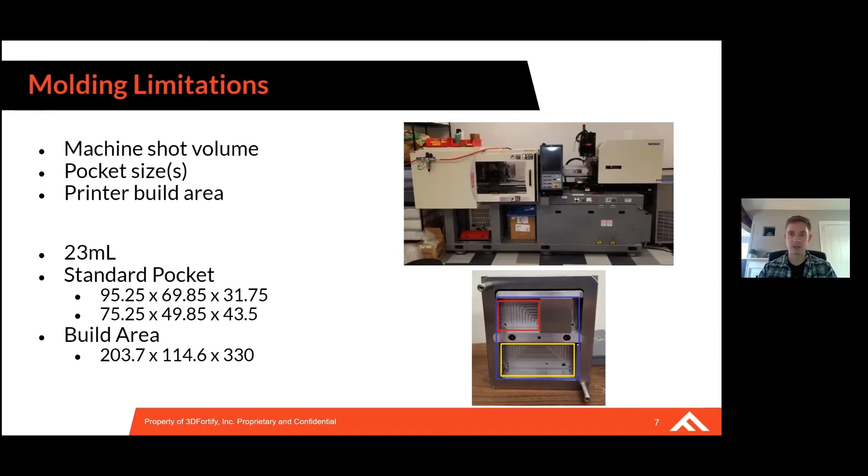So once you set up your bounding box for what's moldable for you, we're going to look at the difference between a moldable part versus an unmoldable part.

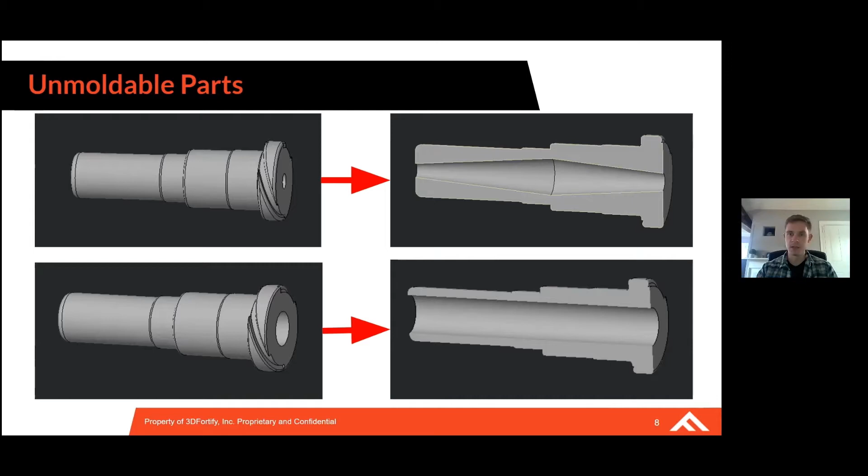With our first example here, we have this luer lock component with 2 separate iterations. The top iteration has a conical shaped through hole going through the center, and the bottom image has a straight through hole going through the center of the part. The top part here is actually an unmoldable part. If we look at this center section, that through hole gets a lot wider in the center than it is on the ends, which prevents us from having any printed geometry going through the center of that luer lock component. So we're not going to be able to eject that geometry, therefore it's an unmoldable part. That's something to look for when you're designing any of these parts. You want to make sure that for any feature you design, you're able to eject that geometry straight out of the part. If you can't do that, then the part is probably unmoldable.

For our second part here, we have this capped part. This one has some nice threads and a through hole. The top part ends up having a surface at the bottom, whereas the bottom part is completely open. This surface at the bottom for the top part is going to, again, prevent us from ejecting any geometry that's inside of this part. So therefore, this would again be an unmoldable part.

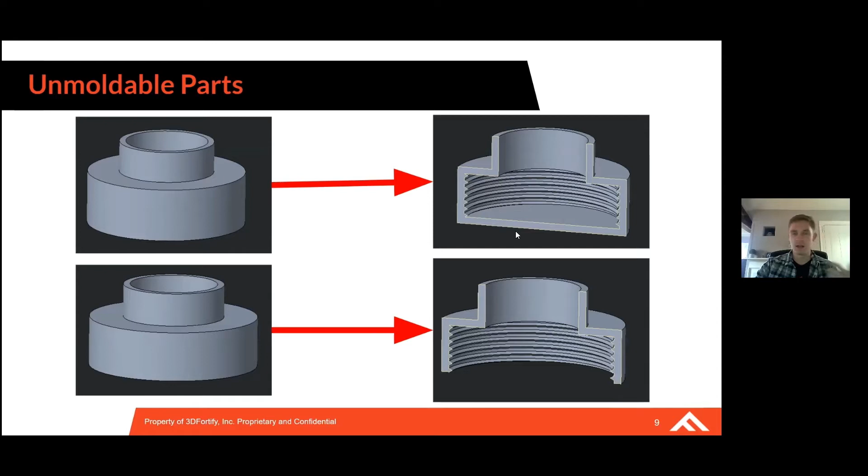Once we've looked at what's moldable, unmoldable, and figured out our limitations for our setup, we can go into start planning out what our design might look like. This is an exercise that I like to do before I design every mold, once I have my base part and I've identified that I can mold it.

I like to ask myself a few questions so I can set myself up to be successful in my design. These questions include: what's your target material? What are the number of cavities for this mold? Are there any draft requirements? What are the high risk features? Looking at sharp corners, does a full redesign need to be done? That's important because you want to do that before you start designing the mold, if necessary. And then start to think about the mold layout a little bit, like is this mold going to have inserts, and what's my ejection strategy going to be?

We'll go through these with these same two parts again, but this list is not the full list. There are certainly other questions you can ask yourself, but these are the main basic ones that I like to think about.

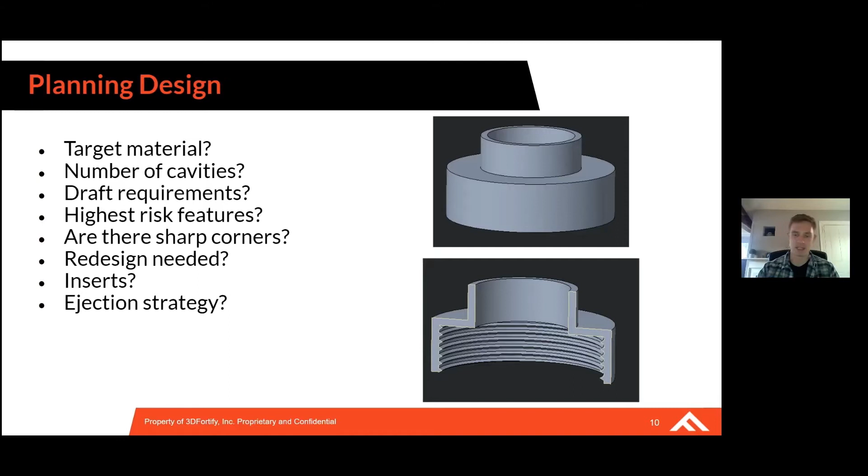For this part here, this cap, it's probably going to be molded out of some sort of nylon. So I picked nylon 6.6, and I wrote down the shrink rate for that material. That's going to be important in a little bit when we actually design this part. We're going to need to account for that shrink rate when the part's being molded so that we can properly scale and account for that.

For this example, I'm going to go with a 1-cavity mold. That's just going to make our lives easier.

Then for draft, I'm going with a generic requirement of 2 degrees of draft. Sometimes you'll see more, you'll be allowed to use 3, maybe more. Sometimes it'll be less, a half degree of draft, but it's good to know what that requirement is before you go ahead and design the mold.

For this part, the highest risk features we're looking at are the thread section and this through hole here. It's good to keep those in mind, especially later on when we plan out our inserts.

Just as a check, there are sharp corners in this part, so if possible, we're going to want to remove those sharp corners with either a chamfer or a radii. With this part, no redesign is needed because it is a moldable part. If we were given one of those unmoldable parts, that's when we would need to do a redesign in order to create that moldable part.

For inserts in this part, we're going to need 1 insert with this thread section, and that has to do with the ejection strategy. So in order to be agile with these printed molds, one thing we like to do is hybrid ejection strategies, where part of the ejection is an automated process with ejector pins in the machine, and part of the process is manual.

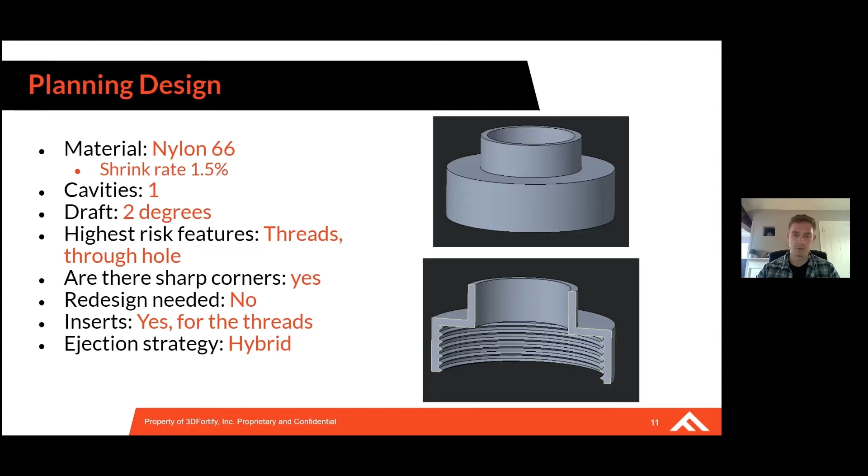Alright, so we'll go through the second part as well. For this material, luer lock component, we're going to go with a polycarbonate, so our shrink rate here is going to be 0.6%. With this tool, we're going to end up designing for 2 cavities, so we'll be able to go through balancing out runners and things like that.

Draft requirements here will be 1 degree, which, since most of the part is circular, isn't a huge consideration, but there are some flat walls that we'll need to account for.

What are the highest risk features here? It's going to be that center through hole in the part, and then the small ribs that create the actual luer lock fitting. We'll want to keep those in mind when we're designing the mold.

Are there any sharp corners here? No, not really. It looks like whoever designed this part already included some radii on a lot of the sharp corners, so we should be all set there.

Again, this part's moldable, so no redesign is needed. For inserts, we're going to do another insert in the through hole section here, which I'll speak on more later, but this will allow us to make this feature robust and potentially use 0 draft in this area. Our ejection strategy is again going to be hybrid, where we eject the parts off the mold with ejector pins, then do a secondary operation to remove the center pin throughout the part.

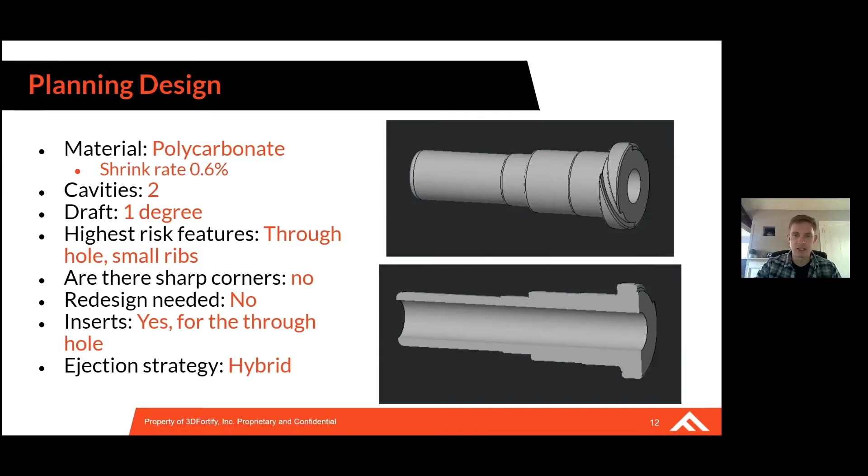Okay, so we've gone through our design planning stuff. Let's actually modify some parts here. We're going to start out with this cap.

You might notice that I have 3 surfaces that are red. These are going to be our potential parting line surfaces. Before you modify a part, you want to know what your parting line is going to be, so you can make all your modifications based off that parting line. What is a parting line? The parting line is essentially going to be the center plane of the part, and that's going to line up with the center plane of your A and B blocks for your mold. So all of your drafting operations and things like that are going to be done based off of this plane.

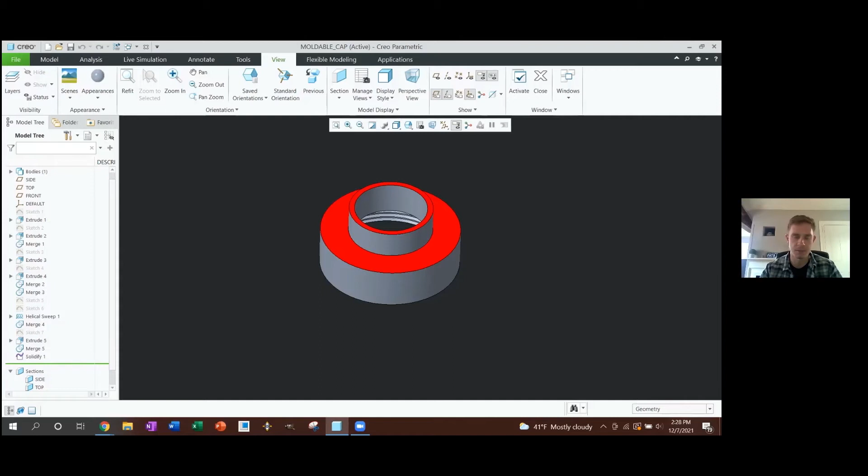So with this part, we have 3 different candidates for our parting line. We have these 2 surfaces here, and then our bottom surface. Quickly, we're going to go through the pros and cons of each surface.

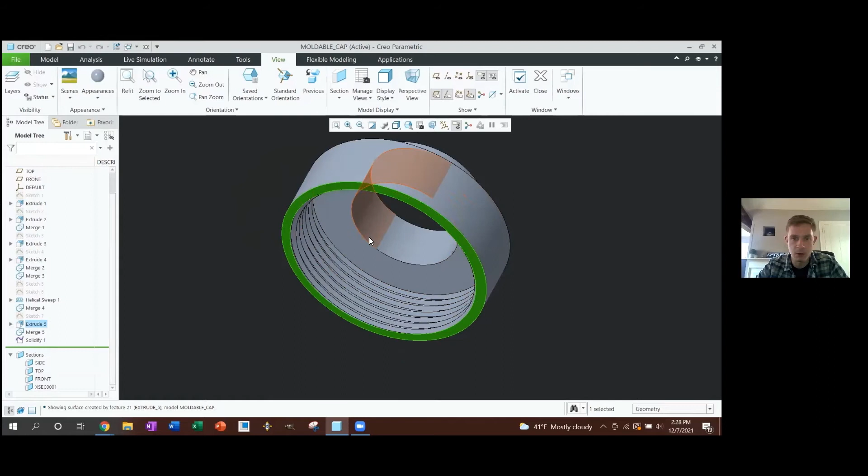So for this bottom surface here, this could be our parting line. If that were our parting line, all these interior features here would be in our core half, and all these exterior features here would be on our cavity half. We could do that, but one thing I want to consider is that this core feature is going to be awfully tall, with features above my threads. Now, I don't know that I want to rotate this feature along with these threads, so I don't know that's my best parting line.

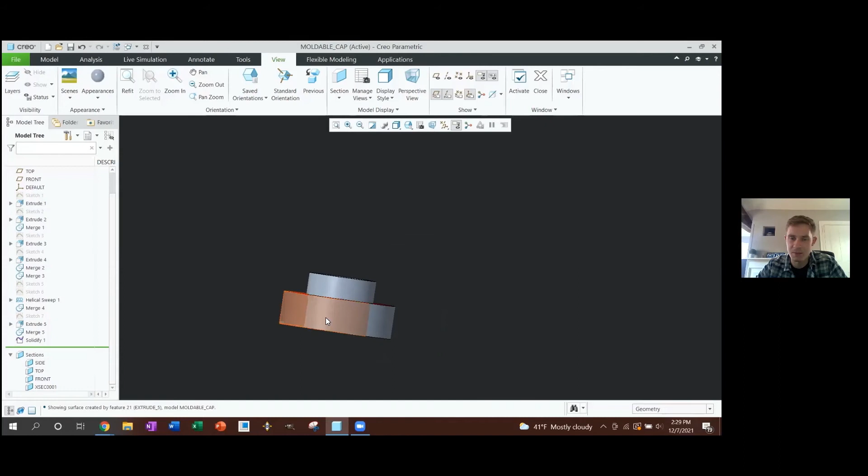We could look at this to be our parting line, and that's going to end up essentially being the same deal as this base parting line here, where the full core is going to be this full through section, and the exterior of the part is going to be our cavity. Still, it's not really what I want to do.

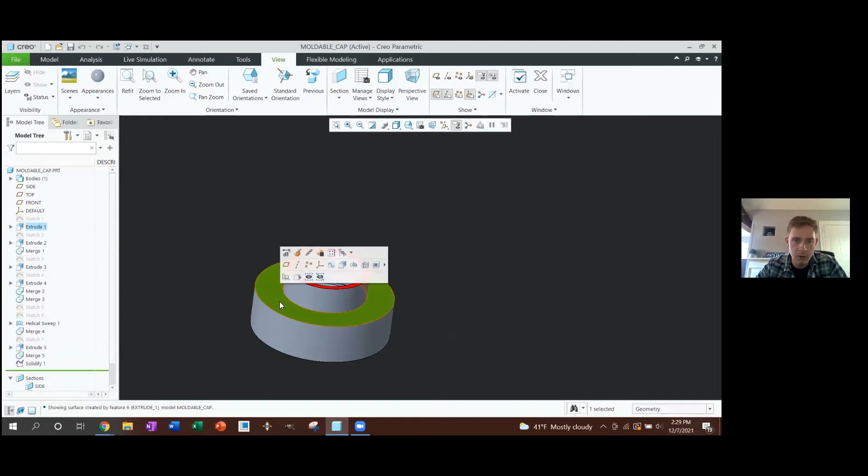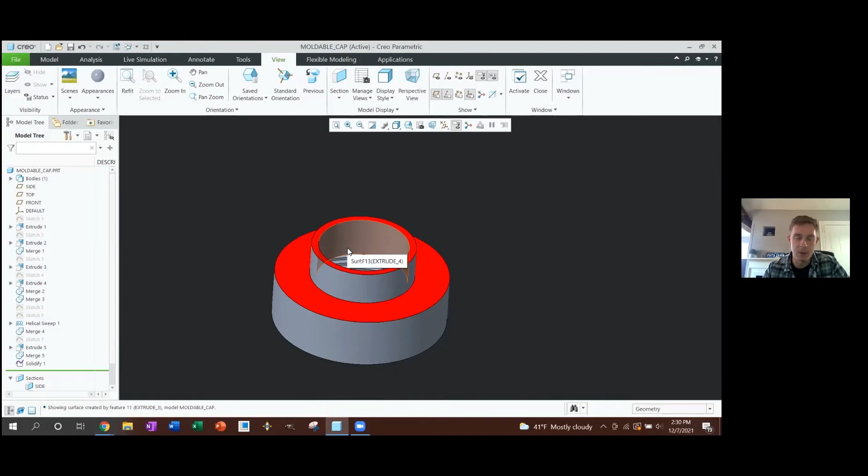I could go with this center plane here as well. If I were to go with this, then on my core half I would essentially just have my threads and they would end at this face here. On my cavity half, I would include these two faces here. So I'd have a nice smaller core feature on my cavity half, essentially splitting up that core, so it's not as high an aspect ratio of a feature. And I'm not really rotating it at all when removing the part, I'm just doing a straight ejection off this core.

So I'm actually going to go with this as my parting line. All my drafting and whatnot is going to be done based off of that. We'll remove those, so now I have my parting line identified.

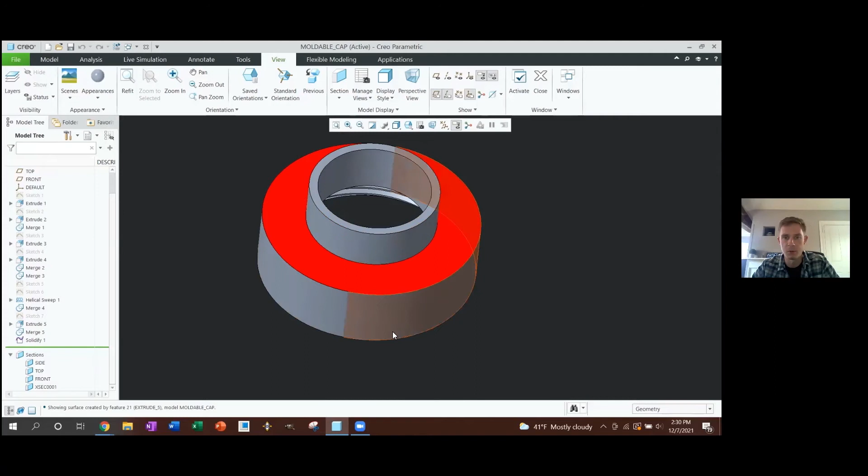First thing I want to go ahead and do is add draft. We'll start out with this top section here, and then move on to the bottom section. We'll go ahead and actually select these surfaces and draft them. Since I made this my parting line, that's going to be my reference plane for the actual draft operation.

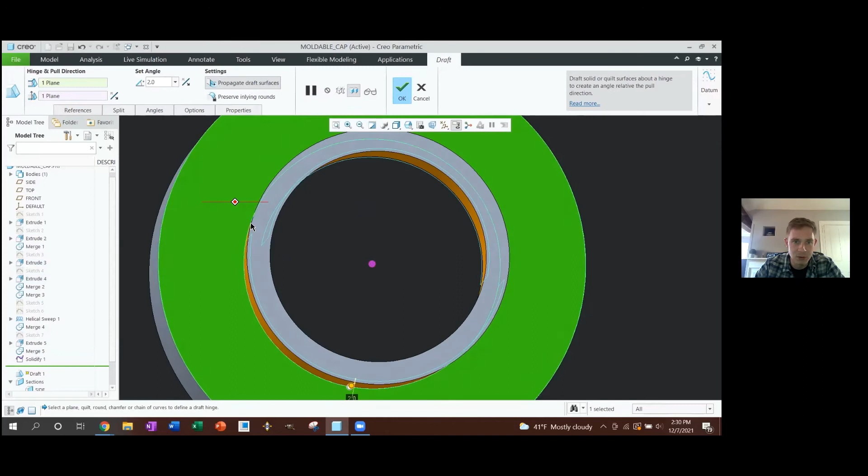So we said 2 degrees of draft, we'll apply 2 degrees of draft. If we look at the part, Creo automatically created a negative draft on this feature, so we'll just go ahead and flip that. Now we have a nice positive draft so that we're able to actually eject out of this section.

Now we'll go ahead and add some draft on the base section here. Again, same deal, selecting this red face as our parting line, and we'll apply 2 degrees of draft here.

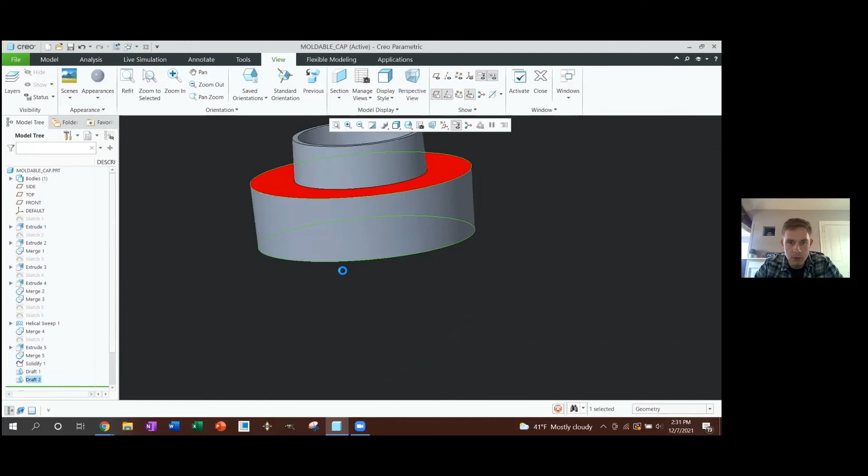Perfect. So if we take a front view of this part, we have our parting line here. We want to make sure everything has essentially an angle that's less than 90 degrees in reference to this surface or plane. So if we look at these parts, the angle here—I guess I can't take that measurement, that's a bummer. Let's do a quick sketch.

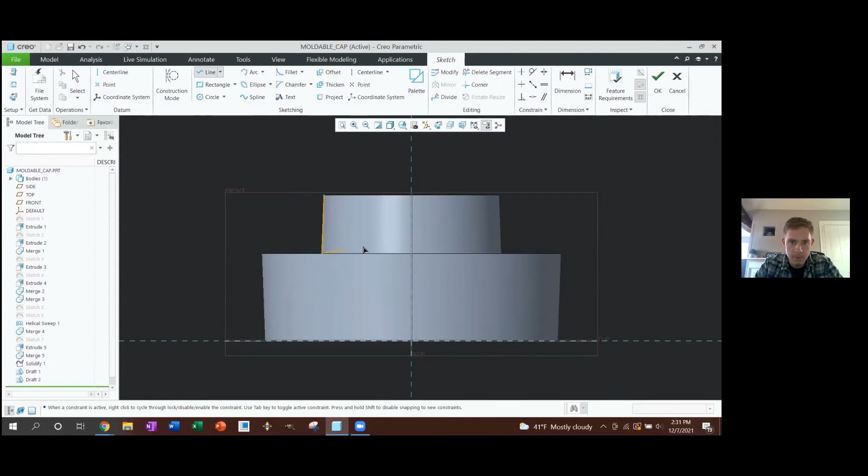We'll take our angle, 88 degrees. So that's less than 90. That means we have 2 degrees of draft on this surface, 2 degrees of draft on this surface, and everything's going to eject nice and smoothly. So we'll close out of the sketch.

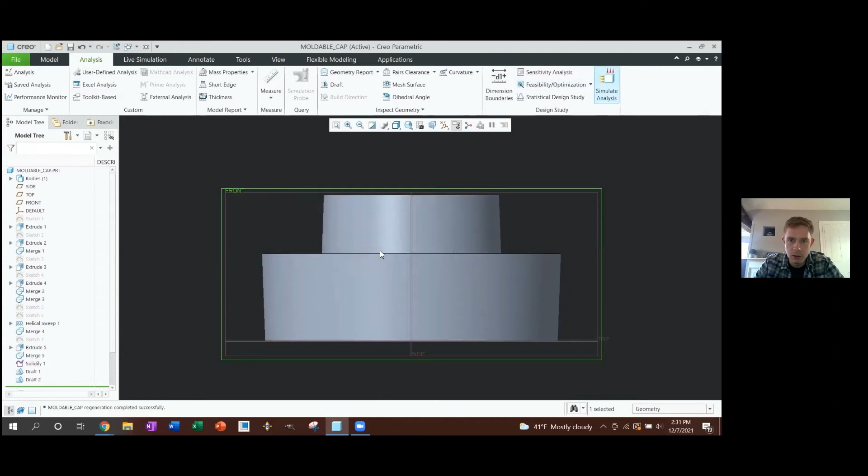Okay, so we have our draft applied. We're all set there. I'm not going to be applying any draft to the thread section here, because we're not going to pull straight off of those threads. We're actually going to rotate off those threads, so we don't really need to apply any draft there, because this is just going to unscrew like a screw might. So we're all set there.

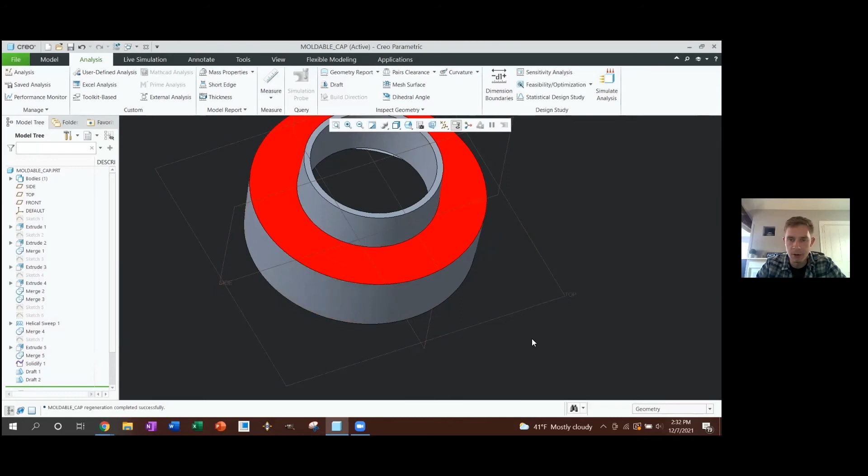Now we're going to go ahead and add in some radii in these sharp corners to help break them up a little bit. So really what I'm seeing is we should reduce that value a little bit, but interior and exterior here, and then exterior there. Everything else is actually going to be fine.

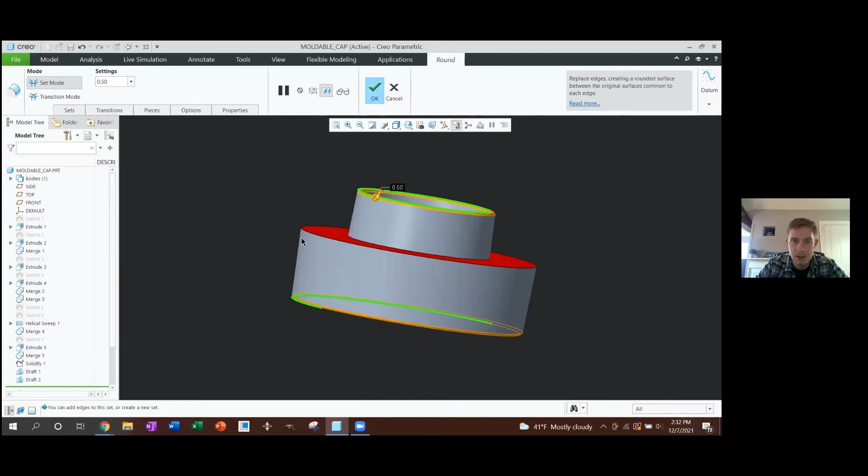So this sharp edge here, this is where the two mold halves are going to meet. Since the mold halves are meeting at that point, you don't need to add any radii to that feature. Same thing with this interior edge here. Mold halves are going to be meeting there, so no considerations need to be made about radii.

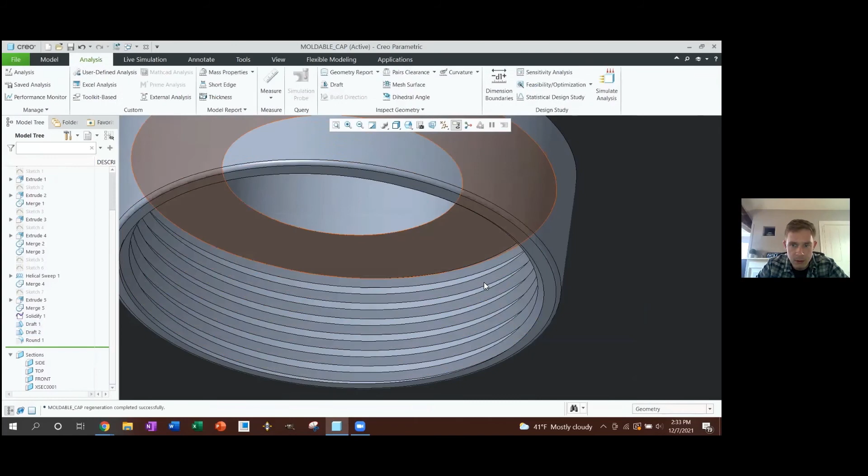What I will try to do, if possible, is get a little radii there. Oh, that's just going to mess it up. So we'll cancel all of that. So we're all set with radii in this part. We know exactly where our inserts are going to be.

So at this point, we've modified this part for the injection molding process, for the Fortify injection molding process. The last step here is going to be to apply a scaling factor. So we'll come up into our model operations and we'll actually scale the model.

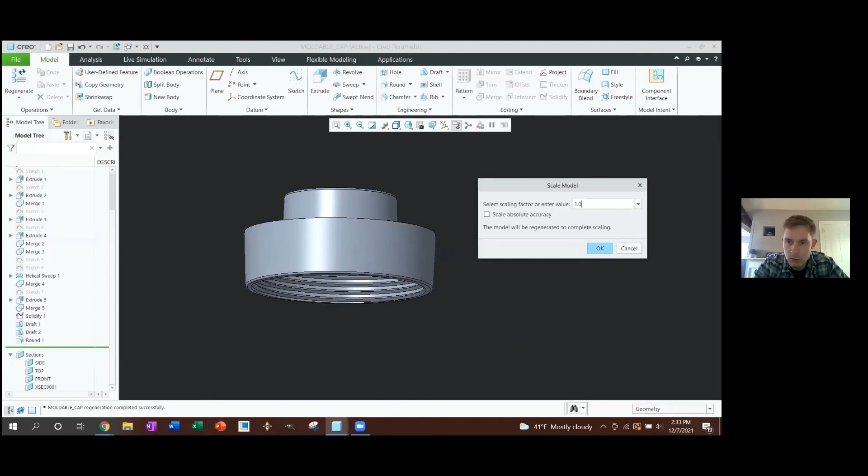So we said before that we want to do 1.5% scaling on this based on the 1.5% shrink of the nylon. So we'll go 1.015. That'll get us our 1.5% shrink, and it's going to account for that value.

So at this point, this part has gone through the motions. This part is ready to have a mold designed around it. So we'll go ahead and save that. And I guess we'll run through the other part real quick.

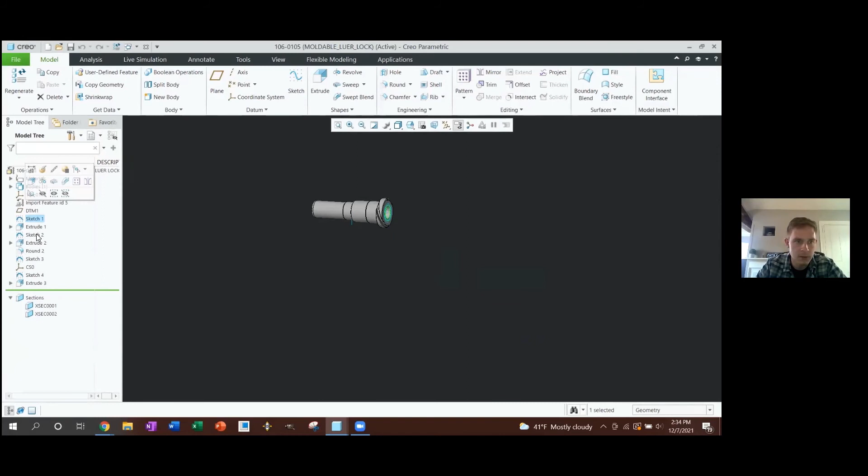Okay, so we have our luer lock component here. Let me hide some sketches. Alright, so for this part, there's a couple different parting lines we could select. We could select this base face here, or we could select this face here.

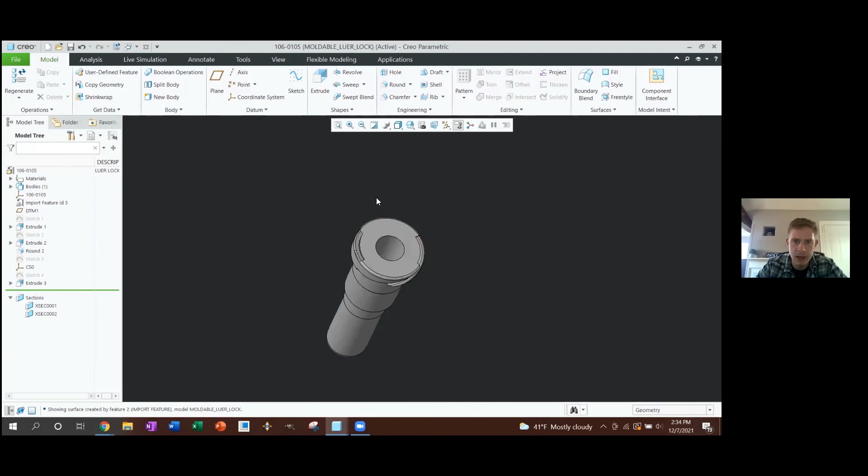Both of those are going to require some sort of side action component or insert to create these tight ribs. So rather than that, I'd rather have these tighter ribs on both the A and the B half respectively, so we don't have to do any inserts around them.

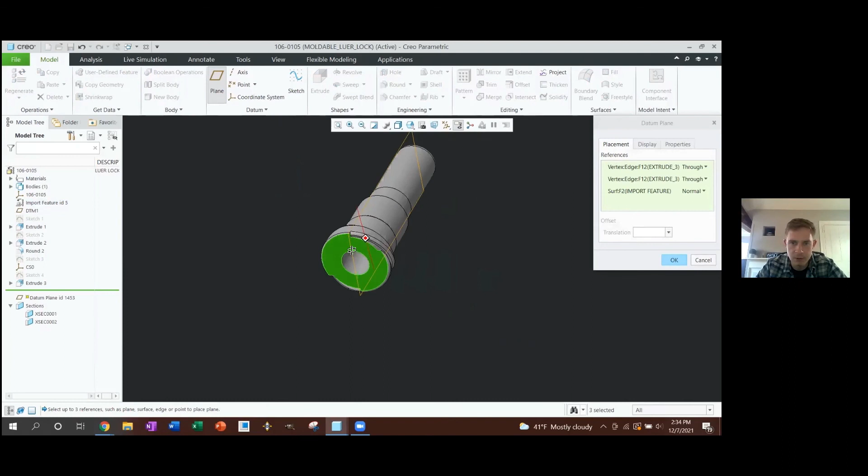So what we're going to actually end up doing is inserting a datum plane. It's going to end up going right through this part here. So what this datum plane is going to allow us to do is just capture both of these features in the A and B halves of the mold, and then we'll create this center geometry as an insert.

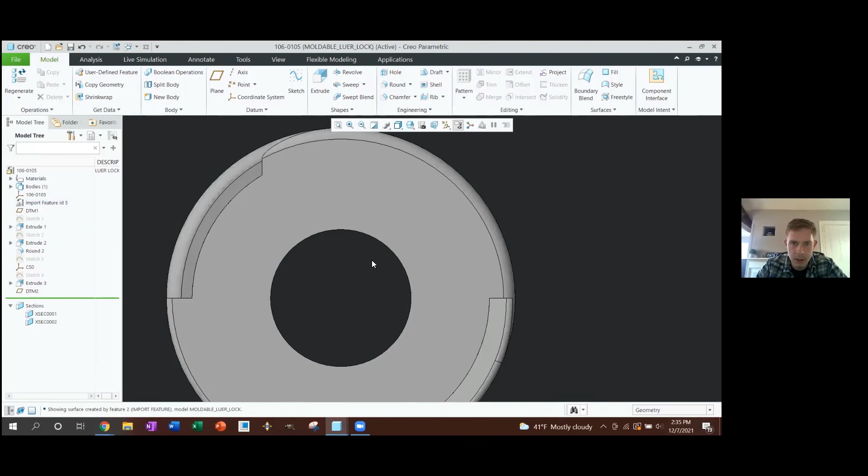So we have our parting line in place. We already have our radii in place, all that good stuff. So let's look at this center through hole here. Right now, this through hole does not have any draft on it.

So we could have had some draft, but I would almost rather use a metal core pin for this feature. What that's going to do is eliminate any risk associated with molding this feature whatsoever, because we've gone from printed material to metal. On top of that, it's going to allow us to maintain zero draft in this feature, which is typically desirable for part designers.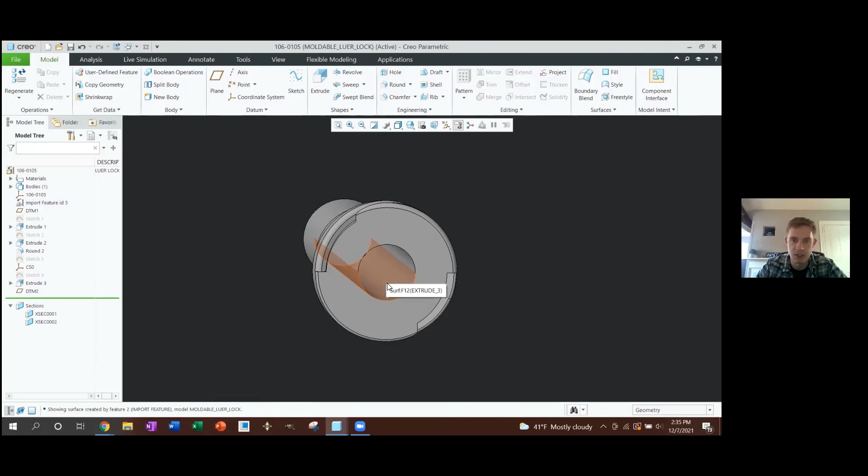And then finally, what's really good about this feature is it's an off-the-shelf component with any sort of supplier. So you're going to be able to source this with overnight lead times, essentially matching the speed of your printing process. Anytime you have to source some sort of metal insert that takes longer than your printing process, that's something you want to avoid. But if you can do it in the same amount of time as your printing process, then it makes a lot of sense.

So we'll have our center insert going through here. We have our parting line identified. All our radii, our sharp corners are broken.

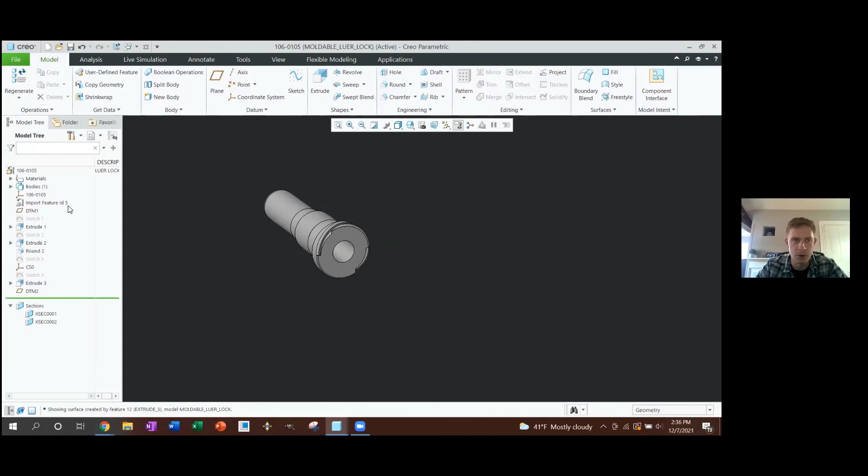So the last step again, we'll go ahead and scale this model. This time we're going with a 0.6% scaling factor to account for the shrinkage of polycarbonate. So we'll apply that. And we are all set.

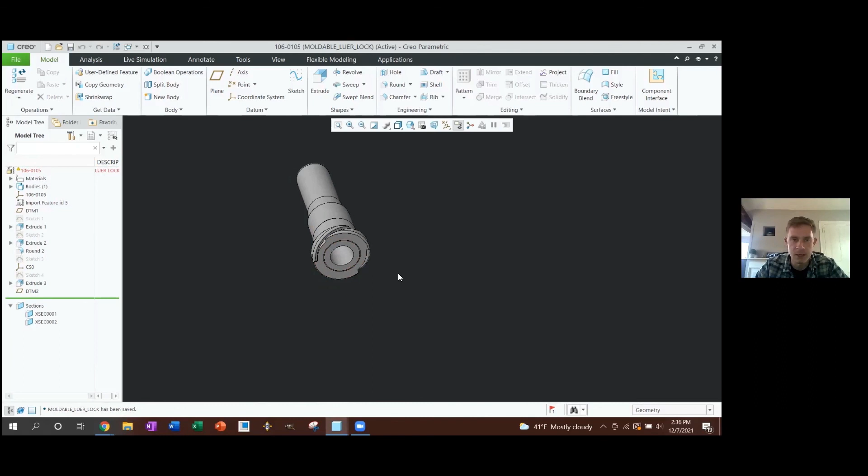So at this point, we have two parts that are both ready for the mold design process. So from here, we'll jump into our next module.